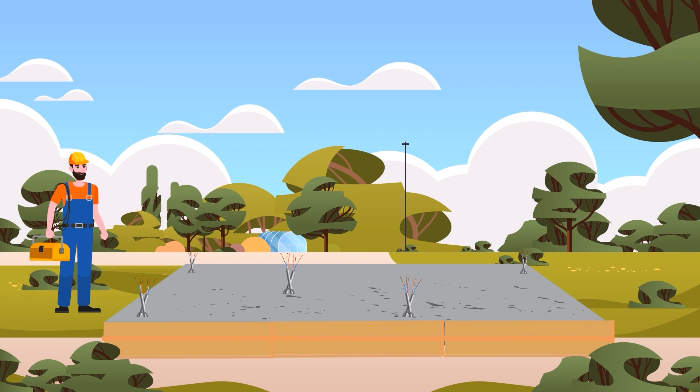Before even considering raising the walls of your Boreal, a primary step is essential: hiring a certified electrician. In compliance with local construction codes, they will oversee the preliminary electrical tasks. Remember, regardless of the floor structure you've opted for, everything begins with the foundation. For those opting for a concrete slab, ensure that specific wires were correctly positioned during the slab's pouring. For wood beam floors, route the wires beneath your floor, bringing them out at the designated spots.

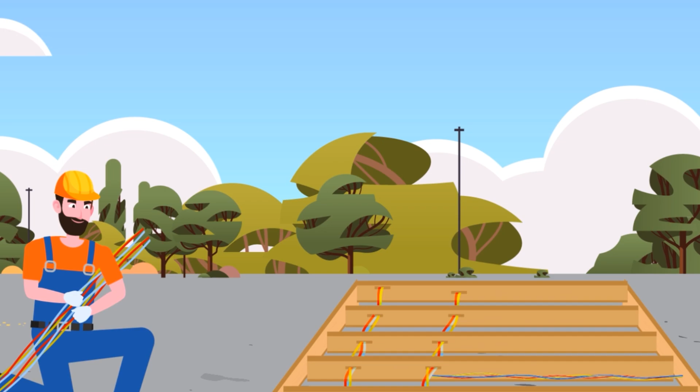With the Boreal electrical blueprint at their disposal, the electrician will begin the task. Their objective: to install the cable. Keep in mind that each Boreal plan is distinct, tailored to your preferences and modifications. The wire installation is achieved by running the cable to the desired spot. Bring out the cable by drilling into the floor based on the precise plan instructions.

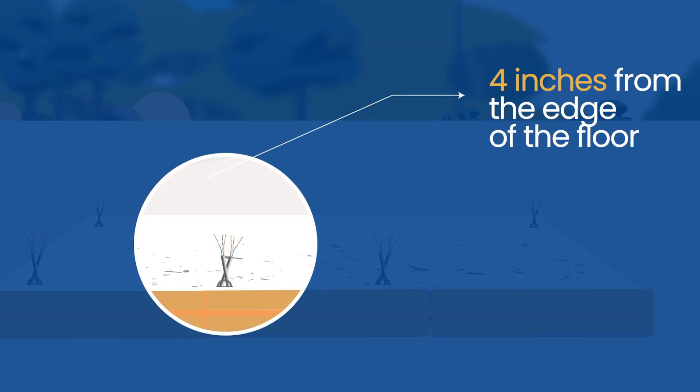This stage entails careful calculations and forecasting, gauging the required wiring, factoring in height adjustments, pinpointing the bespoke outlets, and accounting for other wiring needs such as lighting, hoods, electrical panel, and more. Reminder: the wiring should emerge 4 inches from the edge of the slab. It's highly recommended to label the wires distinctly to simplify subsequent installation phases and prevent any mix-ups.

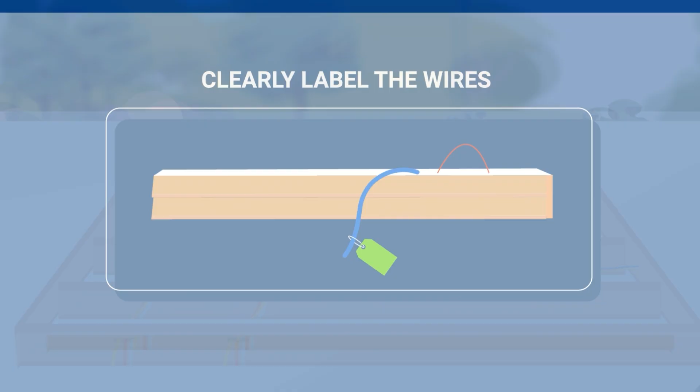Within your construction blueprint, consult the electrical guide to confirm you've allocated ample wire length for each setup. Ensure your electrician has comprehensively reviewed and grasped the plan. Always have at least 1 foot more than the stipulated length. Congratulations, you've navigated the most vital phase, wire planning. You're now transitioning to the wall assembly phase. We encourage you to view the wall assembly video or installation guide for subsequent procedures.

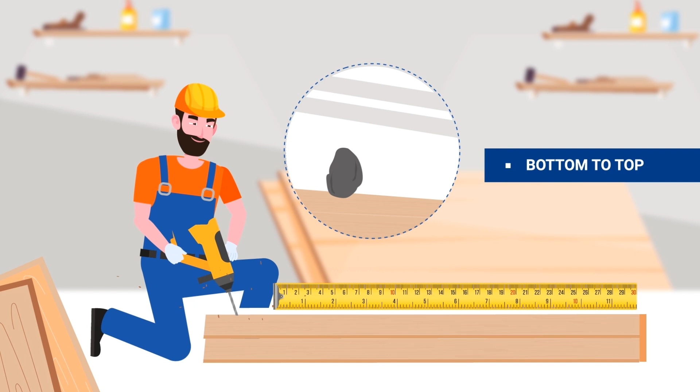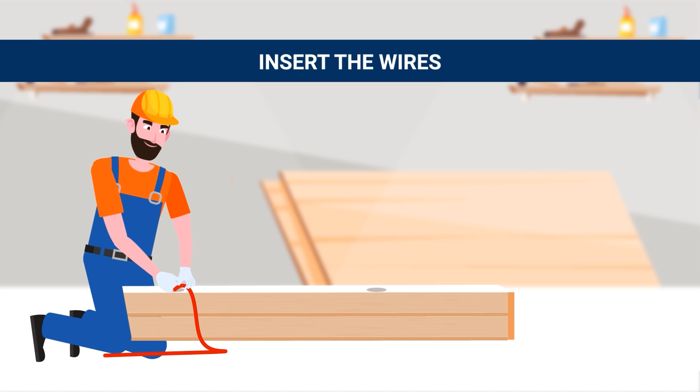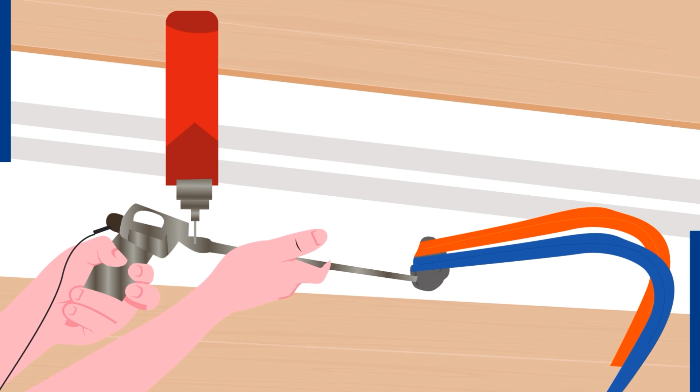To pierce the Thermolog insulation, employ a 1-inch electrician's drill bit. For optimal insulation, always drill from inside to outside, ideally from the bottom upward. Once cleaned meticulously, you can proceed to insert the wires. The installation process continues. Every Thermolog demands measuring, drilling, and threading of cables. Remember, each opening necessitates urethane foam. Be careful. Besides ensuring correct wire lengths, remember that some wires are designated for specific series outlets.

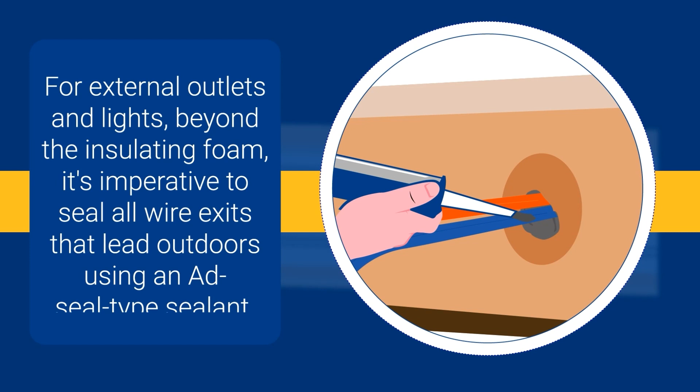For external outlets and lights, beyond the insulating foam, it's imperative to seal all wire exits that lead outdoors using an Ad-seal type sealant. At this juncture, it's vital to continue your electrical circuit seamlessly from switches to lights or other end devices. Closely follow your blueprint to gauge the cable length needed between the switch and its destination. For ceiling lights, ensure a generous length of wire is prepared and positioned at the top of the wall.

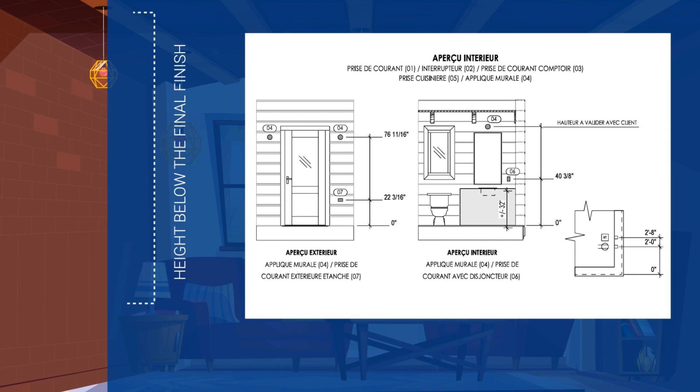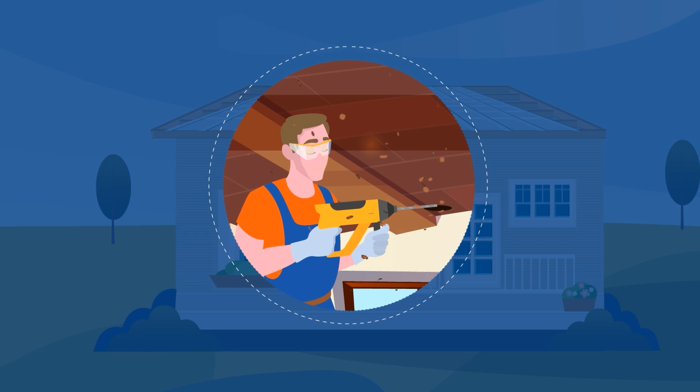For mezzanines, diligently review your cross-sectional blueprint to discern the height below the final finish. For discrete lighting below the mezzanine, think about employing moldings to conceal your cables. For ceiling and exterior eave lights, ensure that you run the wires after completing the roof insulation assembly, but before starting the plywood installation. From the interior, drill at the chosen spot to route the wire outside the roofing. Then, guide it to its terminal position, ensuring every drilled hole in the roof is sealed to prevent heat loss.

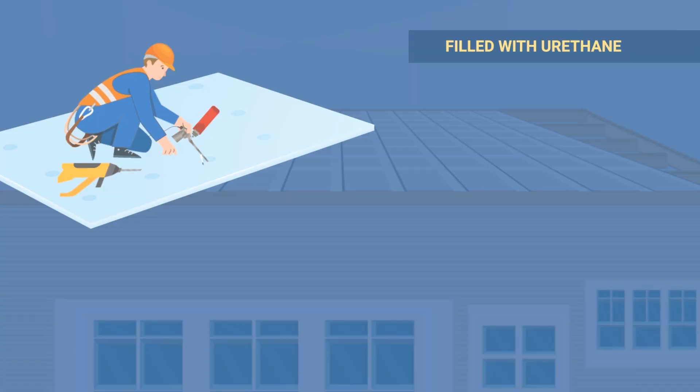For exterior lighting, route the cables across the roof overhang. It's paramount that each hole is filled with urethane. Should you encounter any uncertainties, keep in mind that the Boreal team is always at your service. You're now poised for a seamless electrical setup.